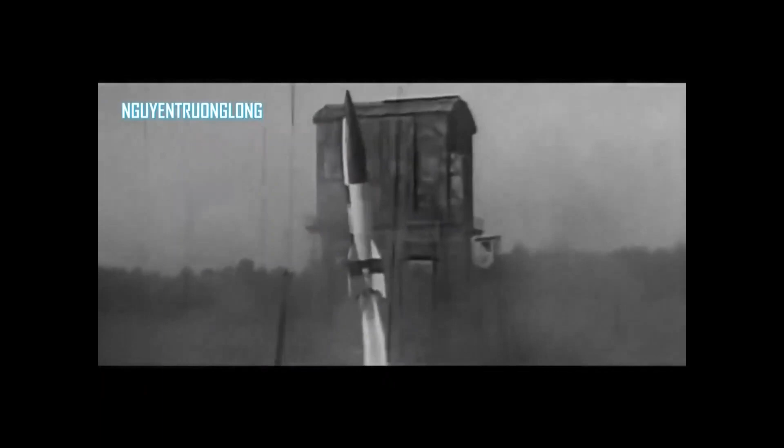The Versailles Peace Treaty had forbidden weapons like tanks, planes, heavy artillery to Germany. But nobody had thought of mentioning missiles. A young Nazi scientist, Werner von Braun, had developed the first controlled unmanned missile, the V-2, and it was used to create havoc in World War II and all over Britain.

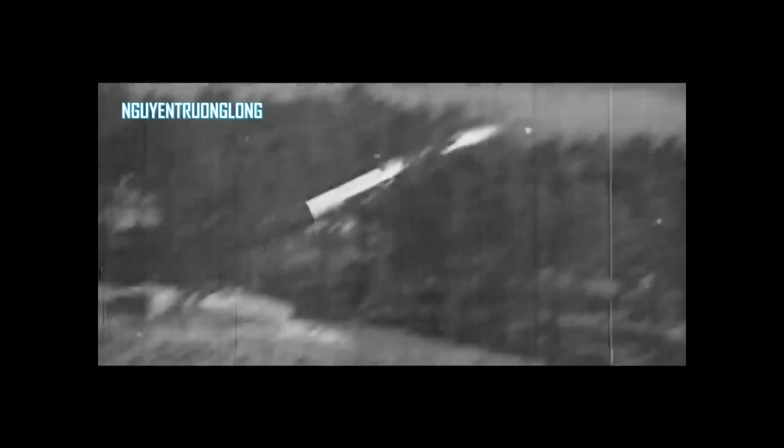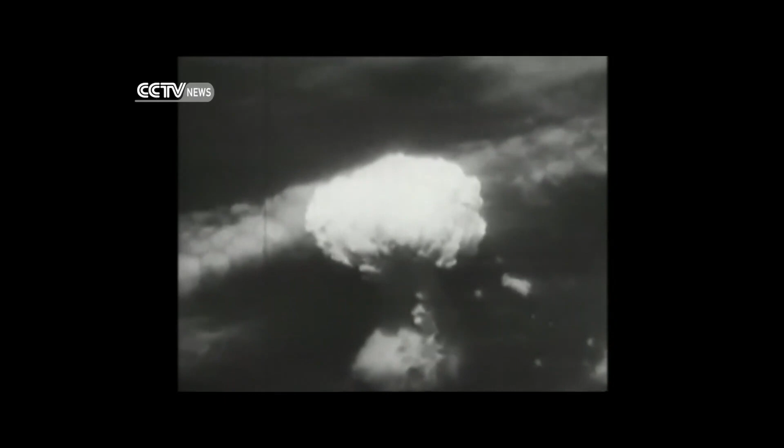But as we know, Germany lost the war, but the science and the scientists didn't go to waste. They were all put to use. Explain to people that don't know what we're talking about. Operation Paperclip was when, after World War II, the United States gathered up a ton of scientists from Nazi Germany, brought them over to America, and even Werner von Braun. They had Werner von Braun run NASA.

He was a Nazi. The Americans and the Russians fought for technological supremacy throughout the Cold War, and the missiles played a core part in them. With integration with nuclear warheads, they could not stop anymore, and all they did was innovate more and more and more.

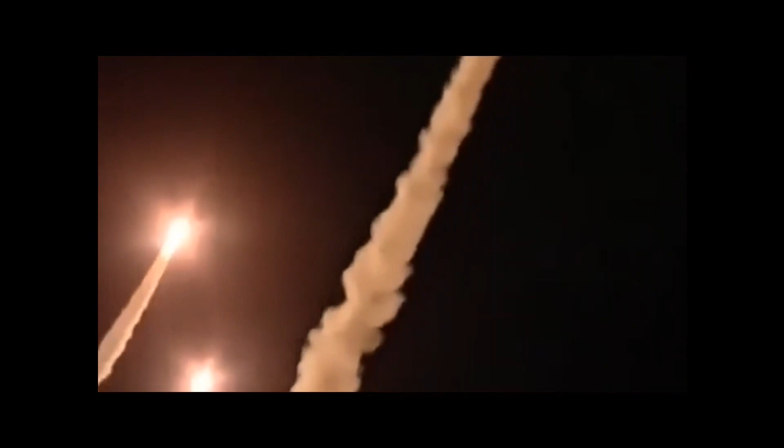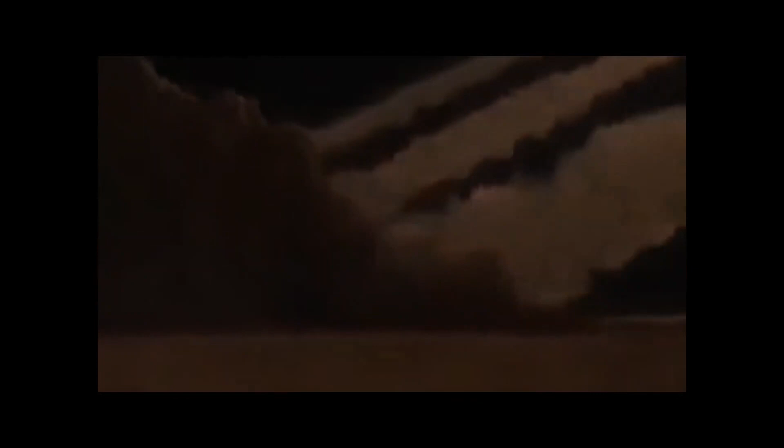One must expect the development of weapons to go down and peace to go up. The development of missiles never went down. In fact, they only sped up. And even today, they are being continually improved with more and more sophisticated technologies. This is missile technology.

Our topic today is subsystems of missile. Our team consists of Mustafa, Deepika, Harush, and myself, Vedram. The outline of the presentation is as follows. We begin with an introduction. We go to talk about the missile guidance system, line of sight system, proportional navigation, warheads, ballistic missiles, and missile propulsion.

A missile is defined as an object which is forcibly propelled at a target, either by hand or from a mechanical weapon. They were developed at the end of World War II when technologies were evolving and people were looking for unmanned systems to attack the enemy. Missiles are engineering feats and they have the best multidisciplinary integration between branches of mechanical, chemistry, aerodynamics, electronics, and computers.

The body of the missile is designed to be aerodynamic so as to efficiently reach from the place where it starts to its destination where it detonates, and it has to do so by using minimal amount of fuel, and it has to make sure that it kills a large number of people per use, and that may vary depending on the mission scenario.

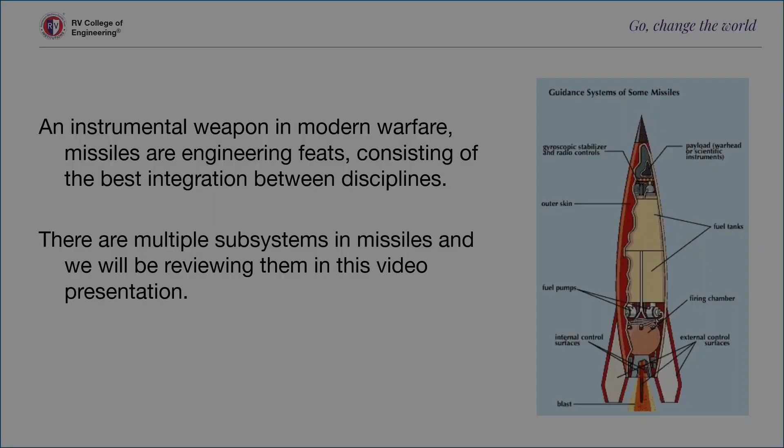The first thing that we will view is the missile guidance system. The missile guidance system consists of three main parts. One is, of course, the navigation, such that it has to reach the destination from where it starts, and the path it takes relies on the guidance. And sometimes we may have to change this path, and for that we have control systems. Now, there are a few types of guiding systems: command guidance, homing or seeker guidance, beam rider guidance, and inertial guidance. I will talk in brief about all these four types of guidances.

In command guidance, the guidance signal is sent from the launch site to the missile, that is from the launch station. This is done because the target may be changing their location, and its whereabouts can be only known to the command base, and it cannot be similarly followed by an algorithm on the missile. At frequent intervals, the missile's deviation from the target to launch line of sight is estimated on the ground, and new orders are subsequently sent to the missile.

The immediate positions of the missiles and the target are discovered to calculate errors. And these use systems such as radios and radars and lidars, sonars also sometimes, and it can also use temperature sensors. It can also be integrated with satellites.

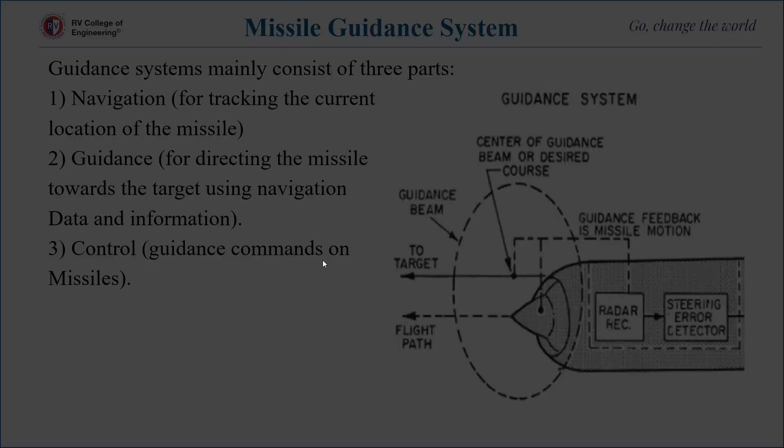The next thing we're going to talk about is a simple line of sight system, where, as it speaks for itself, there are three components. There is the base station, the missile, and the target. And the missile takes the path along the line of sight of the command station and the target. These three things align such that the target is hit.

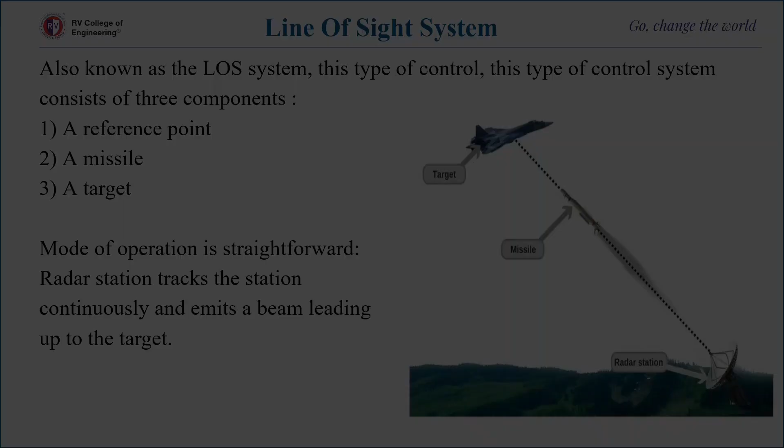The next thing that we're going to talk about is proportional navigation. This is also a method of hitting the target, where a missile is launched in such a way that, again, this comes under the inertial guidance system. It is pre-calculated. The missile launch is pre-calculated such that the missile reaches a place where the target will be in some time, and the path it follows after a point will maintain a constant slope with the target.

It relies on the fact that the two objects are bound to collide if their direct line of sight does not change as the range closes. In a proportional navigation system, the missile stays on trajectory with a constant bearing angle to the target.

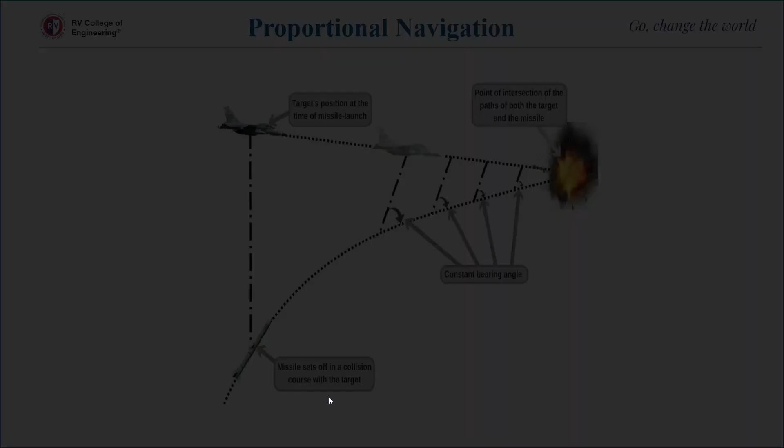Now, Harush will continue and we'll talk about missile warheads. So I'm Harush, and as mentioned in the slide, warheads are the explosive chemicals which are delivered by a missile. So, a missile being a destructive weapon, its main aim is to detonate and discharge the warhead such that it eliminates the enemy or the target.

So, each type of target is subjected to different physical destruction intensities. So, the same warhead can't be used for all kinds of targets. We need to make sure that there is maximum impact in the attack made by the missile, and also make sure that the warhead used is cost effective. The types of warheads include explosive, conventional, blast, fragmentation, nuclear, chemical, and biological.

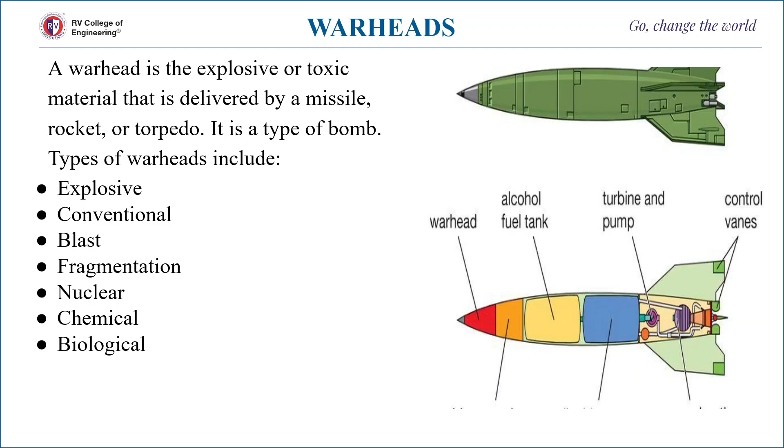The different parts of a warhead are the fuse, explosive chemicals, and the warhead case. The warhead case is basically the protection inside which the chemicals are placed, and the fuse is the essential part. It activates the warhead mechanism when the missile is in the vicinity of the target. It also maintains the warhead in a safe condition during all the initial phases before the discharge. So it basically includes different kinds of sensors which get activated as the missile gets closer to the target.

Okay. So in this slide, we're speaking about the ballistic missiles. They are the ones which use projectile motion to deliver warheads on a target. These missiles are guided only during a brief period of their trajectory and not during their entire trajectory. So most of their flight is unpowered. A ballistic trajectory includes three phases, that is boost phase, mid-course phase, and terminal phase.

So the mid-course phase is the phase during which the warhead is discharged from the ballistic missile. This missile is launched directly into the high layers of Earth's atmosphere initially. It travels outside the Earth's atmosphere, and this is when the warhead is discharged. And this warhead falls back to the Earth's surface, such that gravity plays a major role in this case. The warhead comes down to the Earth's surface where it hits the target and it eliminates the target. Yeah.

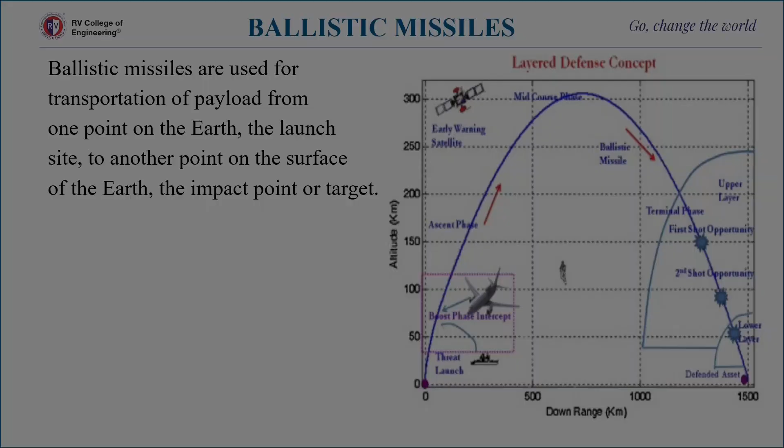Mustafa is going to continue now. So I'm Mustafa, and now I'll be talking about missile propulsion. So whenever we need a missile to be launched and to actually go hit its target, it has to first be launched and sent into its path towards the target. For that, we need propulsion, which is usually carried out by a rocket, from which the missile is then ejected.

So talking about the basic physics of the propulsion, it's nothing but Newton's third law of motion being followed, and the principle of conservation of momentum is in action. Here we can see the simple derivation for the expression for thrust of a rocket. It's u times r, where u is the velocity of exhaust relative to the rocket, and r is the rate of mass ejection. And here the negative sign indicates that motion is in the opposite direction.

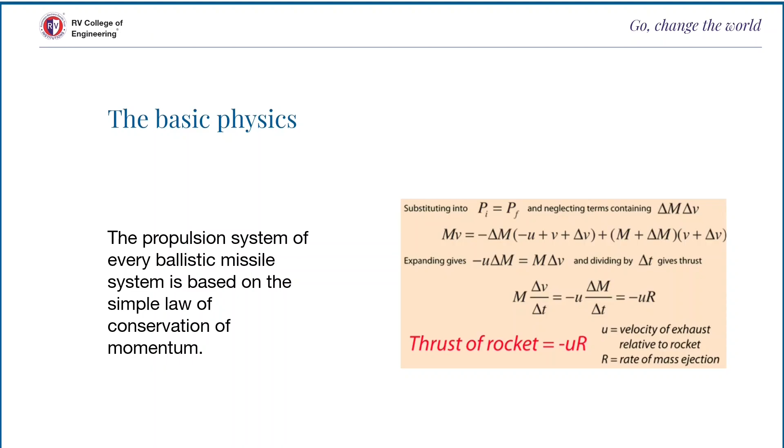Coming to propulsion systems, there are solid, liquid, hybrid, and solid liquid hybrid propulsion. There's gas turbine engines and ramjets. Talking about solid propellants, they're composed of a mixture of granules of solid oxidizers such as ammonium nitrate, ammonium dinitramide, or potassium nitrate in a polymer binding agent with flakes or powders of energetic compounds like RDX or HMX.

Sometimes burn rate modifiers like iron oxide are also added. So talking about the advantages and disadvantages of solid propellants. Solid propellant rockets are much easier to store and handle than liquid propellant rockets. High propellant density makes for compact size as well. These features plus simplicity and low cost make them ideal for military and space applications.

Their simplicity also makes solid rockets a good choice whenever large amounts of thrust are needed and cost is an issue. The space shuttle and many other orbital launch vehicles also use solid fuel rockets. A disadvantage is that it has a lower specific impulse, which is a measure of propellant efficiency, when compared to liquid rockets. As a result, the overall performance of solid in upper stages is less than liquid.

Now, talking about liquid propellants, the main type of liquid propellants are storable propellants, which tend to be hypergolic or cryogenic. Liquid fuel rockets have higher specific impulse than solid rockets and are capable of being throttled or shut down or restarted. Cooling can be done regeneratively with liquid propellants.

The primary specific impulse advantage of liquid propellants is due to the availability of high performance oxidizers like liquid oxygen, dinitrogen tetroxide, and hydrogen peroxide, which are available and have better specific impulse than ammonium perchlorate, which is used in most solid rockets. The main difficulty with liquid propellants is also with the oxidizers.

Storable oxidizers such as nitric acid and nitrogen tetroxide tend to be extremely toxic and highly reactive, while cryogenic propellants, by definition, must be stored at low temperature and can also have reactivity or toxicity issues. Liquid oxygen, also known as LOX, is the only flown cryogenic oxidizer. Others, such as FLOX, a fluorine/LOX mix, have never been flown due to instability, toxicity, and explosivity.

Now, talking about hybrid propellants, hybrid propellants have a storable oxidizer used with solid fuel, which retains most virtues of both liquids and solids. The fluid oxidizer can make it possible to throttle and restart the motor just like a liquid fuel rocket. Hybrid rockets can also be environmentally safer than solid rockets since some high performance solid-phase oxidizers contain chlorine versus the more benign liquid oxygen or nitrous oxide often used in hybrids.

This is only true for specific hybrid systems. There have been hybrids which have used chlorine or fluorine compounds as oxidizers and hazardous materials such as beryllium compounds. Because just one constituent is a fluid, hybrids can be simpler than liquid rockets depending on the motive force used to transport the fluid into the combustion chamber.

Hybrid motors suffer two major drawbacks. The first, same as solid rocket propellants, is that the casing around the fuel grain must be built to withstand full combustion pressure and often extreme temperatures as well. However, modern composite structures handle this problem very well. And when used with nitrous oxide and solid rubber propellant, a relatively small percentage of fuel is needed anyway, so the combustion chamber is not especially large.

Talking about gas turbine engines, during World War II, a new type of airplane engine was developed in Germany and England. This engine was called a gas turbine engine. We sometimes call this engine a jet engine. Early gas turbine engines worked much like a rocket engine, creating hot exhaust gas which was passed through a nozzle to produce thrust. But unlike the rocket engine, which must carry its oxygen for combustion, the turbine engine gets its oxygen from the surrounding air.

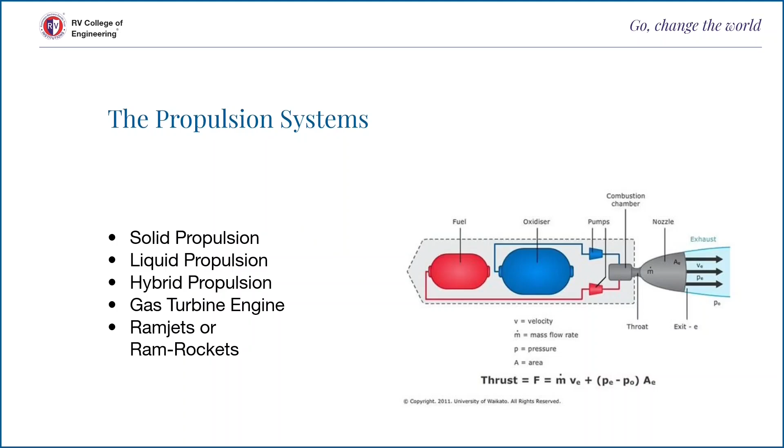Now, talking about ideal properties of propellant. Next slide, please. One more.

So, an ideal propellant should have high specific impulse. It should produce low molecular weight gases. It should be non-toxic. It should produce only non-toxic gases on combustion. It should burn at a slow and steady but predictable rate. It should possess low ignition delay, that is the time taken by propellant to catch fire in presence of the oxidant. It should have high density.

The effectiveness of thrust chamber cooling should be high. It should be stable over a wide range of temperature. It should be non-corrosive and produce high temperatures on combustion. And cost should be low and availability high.

Now, Deepika will be continuing from here. Hello, I'm Deepika. So, talking about specific impulse, it is a measure of how efficiently a reaction mass engine creates thrust.

For engines whose reaction mass is only the fuel they carry, specific impulse is exactly proportional to the effective exhaust gas velocity. As you can see on the slide, there's a simple derivation of specific impulse. A propulsion system with higher specific impulse uses the mass of the propellant more efficiently. In case of a rocket, this means less propellant needed for a given delta V, so that the vehicle attached to the engine can more efficiently gain altitude as well as velocity.

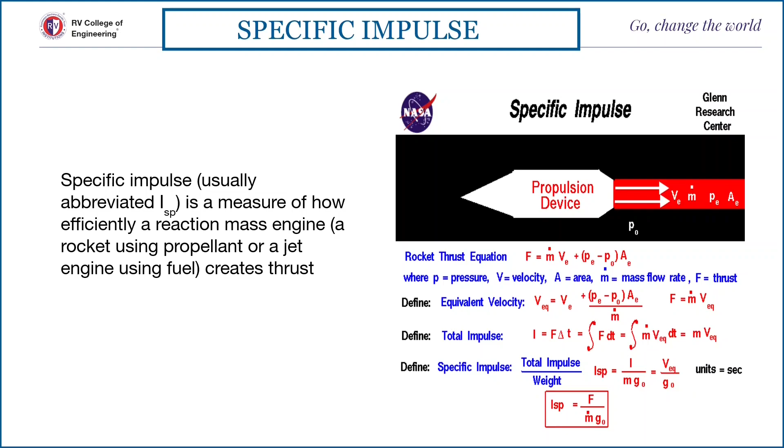RP-1, also known as rocket propellant one or refined petroleum one, is a highly refined form of kerosene, outwardly similar to jet fuel. It provides a lower specific impulse than liquid hydrogen, but is cheaper, is more stable at room temperature and presents a lower explosion hazard. RP-1 is far denser than liquid hydrogen, giving it a higher energy density. It also has a fraction of the toxic, carcinogenic effects of hydrazine, another room temperature liquid fuel.

During and immediately after World War II, alcohols were commonly used as fuels for large liquid fuel rockets. Their high heat of vaporization kept regeneratively cooled engines from melting, especially considering that alcohols would typically contain several percent of water. However, it was recognized that hydrocarbon fuels would increase engine efficiency due to slightly higher density, lack of an oxygen atom in the molecule and negligible water content. Regardless of whatever hydrocarbon you use, it would also have to replace alcohol as a coolant.

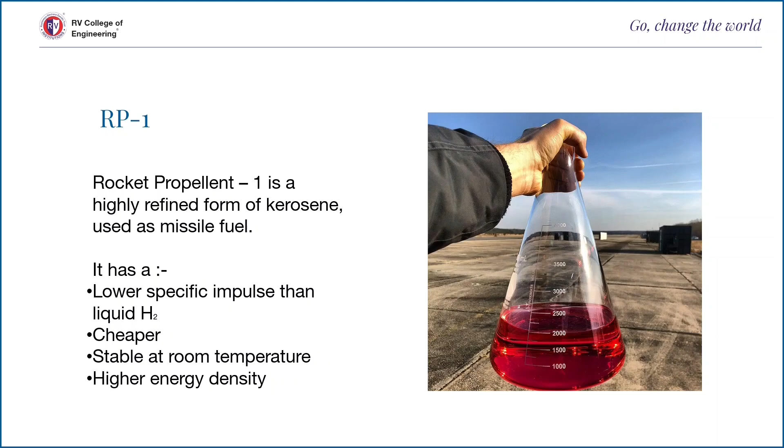Many early rockets burned kerosene, but as burn times, combustion efficiencies, and combustion chamber pressures increased, engine masses decreased drastically, which led to unmanageable engine temperatures. Kerosene used as a coolant tends to dissociate and polymerize. Lightweight products in the form of gas bubbles cause cavitation, and heavy ones clog the cooling passages in the engine. The resulting coolant starvation raises the temperature further and causes more polymerization, which accelerates the breakdown. The cycle rapidly escalates until an engine wall rupture or other mechanical failure occurs, and it persists even when the entire coolant flow consists of kerosene.

Mixed oxides of nitrogen: one of the engines used by India, called the Vikas, used this. The engine uses up to 40 metric tons of UH25 as fuel and nitrogen tetroxide as oxidizer, with a maximum thrust of 725 kilonewtons. An upgraded version of the engine has a chamber pressure of 58.5 bar as compared to 52.5 bar in the older version, thus producing a thrust of around 800 kilonewtons.

And coming to the next slide, India has studied, produced, and used various strategic and tactical missile systems. Decades-long projects have realized development of all types of missile systems, including air, cruise, anti-ship, air defense, air-to-air, and anti-missile systems. India is one of the 7 countries in the world with ICBMs and one of the 4 countries with anti-ballistic missile systems. Since 2016, India has been a member of the Missile Technology Control Regime.

The use of rockets for warfare in India has been recorded as early as the 18th century. Mysorean rockets were the first iron-cased rockets in the world that were successfully deployed for military use. Mysore's conflict with the East India Company exposed the British to the technology, leading to the development of Congreve rockets and the introduction of rocketry in Europe. Hence, rockets were first used in India.

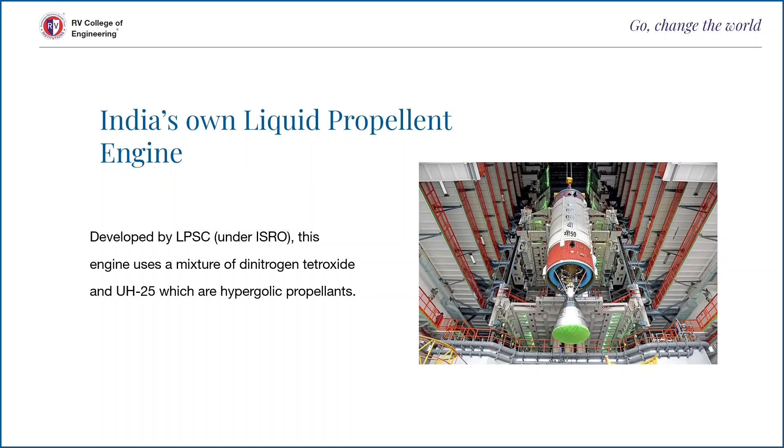And coming to the future of India and missiles and rockets, the technology is expected to become the basis of India's hypersonic missiles and aircraft in future. India has developed an anti-radiation missile, ARM, that will help to destroy enemy advanced warning systems. And that's all. Okay, this brings us to the end of our PPT.